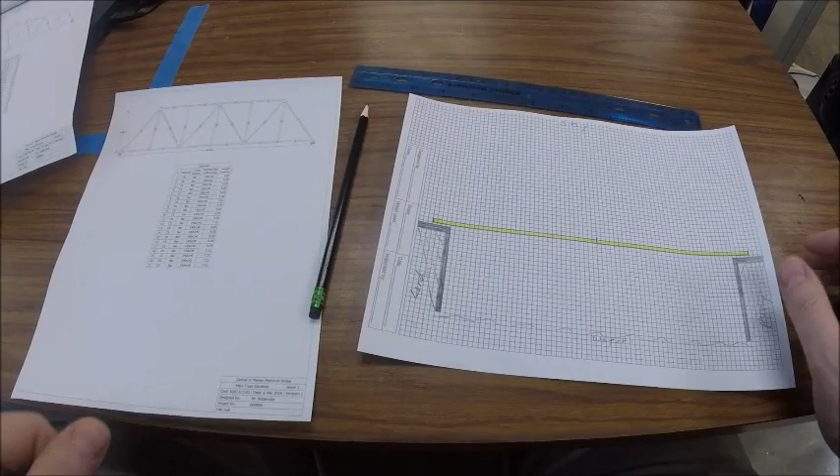Hey everybody, on this video I'm going to show you how to make a standard through truss bridge. So if your printout is something like this, it's a standard one section through truss bridge. It doesn't have to have verticals, but it'll work for this. This is a process you're going to use to do a standard through truss bridge.

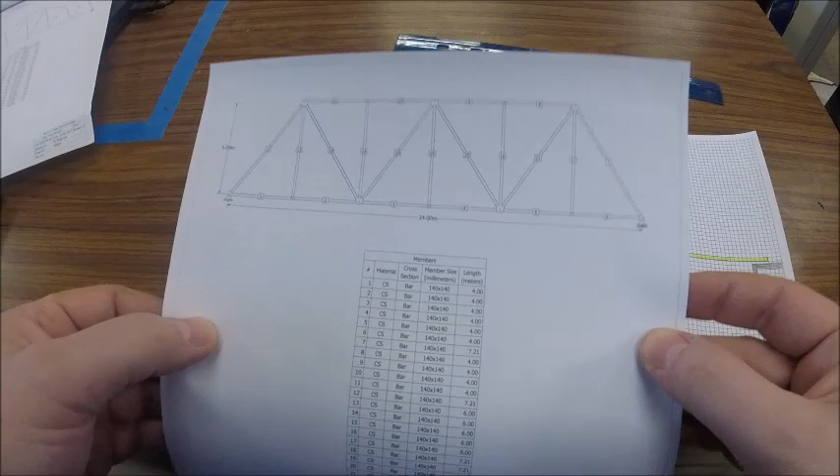You'll need your printouts, your yellow bridge building sheets. I'm using white so all my marks show up better for the video, but you'll need to have a yellow sheet. You're also going to need a ruler and a pencil, not pen, a pencil.

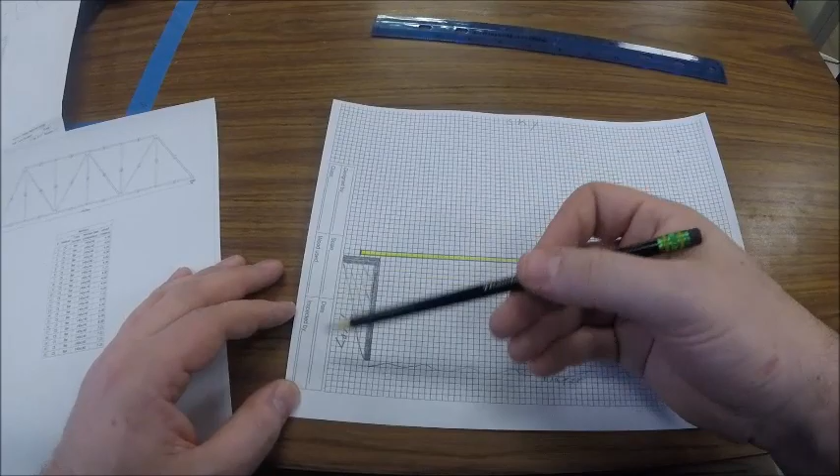The first thing you're going to do when you get your yellow sheets is over here on the left, it says designed by and class. Don't worry about the other ones, we won't use that. What you're going to do then in the designed by is write your first and last name. So I'm putting Mr. Rademski. You're going to write your first and last name, and for class you'll put whichever class period it is you're in.

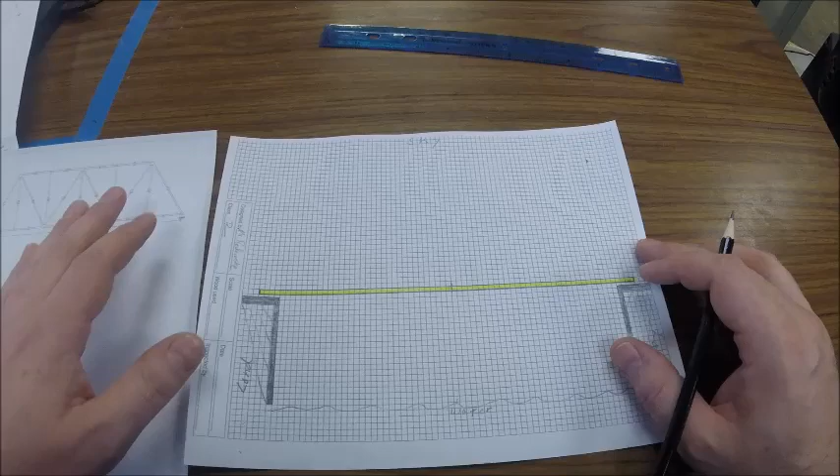What we're going to do to start this off is we have to first look at some minimum sizes. So for a standard through truss such as this, there is a minimum height requirement. Okay, to do that you have to find your road deck. I have highlighted my road deck yellow so that you can see it. Yours is not yellow on your page. It is just an outline here that you can see. That is the road deck. That must be included into your drawing. That will be the bottom beam of your bridge.

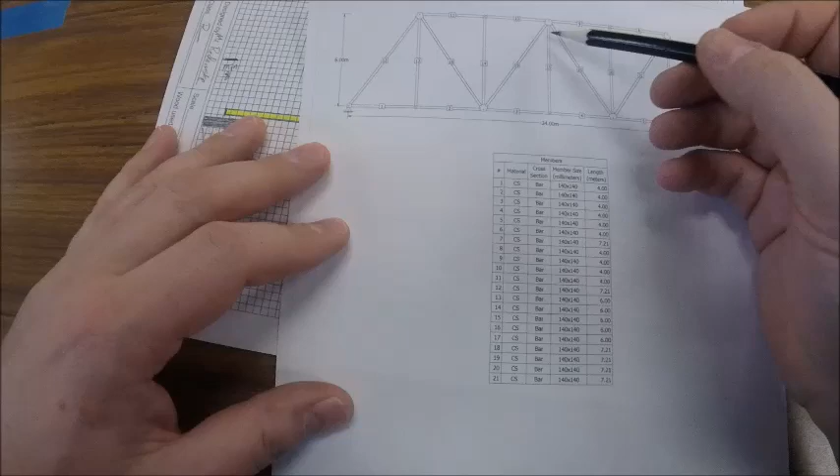The minimum height requirement above this is 8 boxes or 8 rows. Okay, so what we're going to do on the end over here, we're going to count up 8 boxes. 1, 2, 3, 4, 5, 6, 7, 8. Okay, at the top edge of that box, we're going to come over and put a line, and you're going to put min for minimum 8. So that line is the lowest that the top edge of your bridge could go. So if you were to build this bridge here, this top beam could be at a minimum of 8.

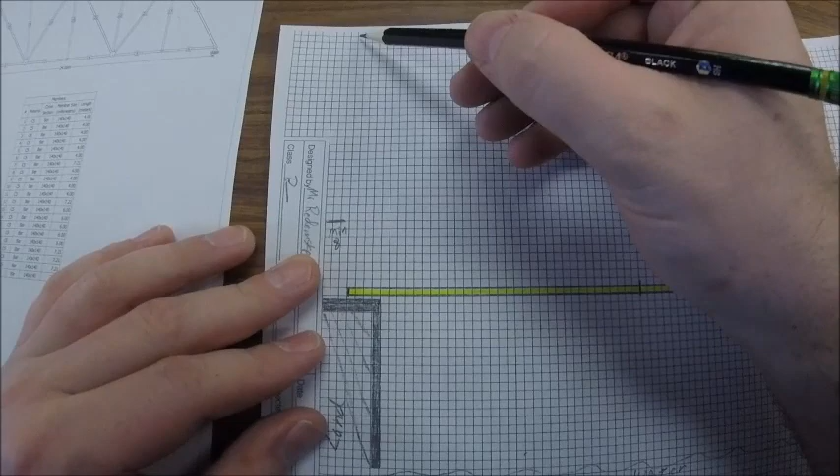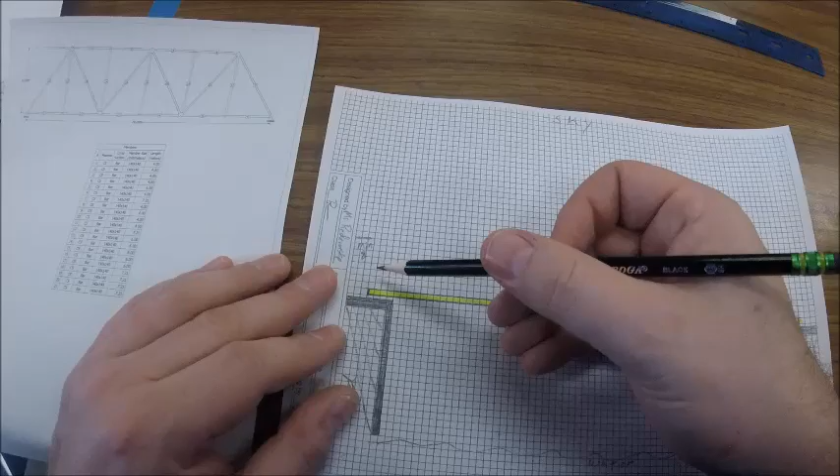Your max for a through truss is all the way up to the top line on your paper. You can come all the way up here if you want. So those of you that want to make it really, really tall, go ahead and make it really, really tall. It just has to fit on the boxes on your paper. So that's the first thing you have to do, is find that, and then you and your partner will need to discuss how tall you want your bridge. Remember, you both have to have the same height.

You're also going to have it where these top corners line up with each other so that your bridge will fit together. So your height and your overall width on top have to be the same. They will be identical on the base so that they fit on the testing rig. So you and your partner right now need to discuss how many boxes is it going to be tall and how wide is it going to be.

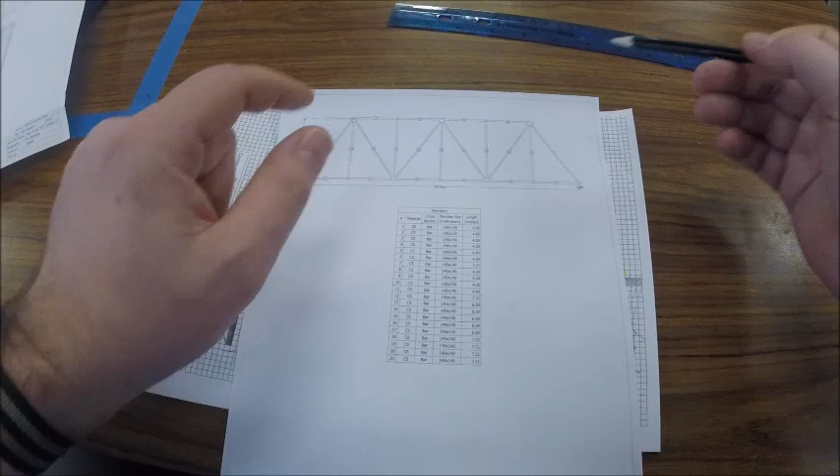Now that you've decided that with your partner, we're going to mark out here on our paper where it's going to go. So I have decided with my partner, myself, that I want to make this bridge 14 boxes tall. So what I need to do, start with my 8, and I'm just going to count up from here. So I'm going to go 8, 9, 10, 11, 12, 13, 14. On my 14th box, what I'm going to do is put a little C shape around it. Now this might not be where the beam is actually going to end, but I'm going to outline these 3 corners of this box.

That is kind of like the end of our wooden beam. Our wood pieces are as wide as these boxes. They're actually square, so when you have the end of it, it looks just like one of these boxes. So this C shape is going to be where I line up my marks. What I'm going to do then is, with my ruler and pencil, very lightly, I'm going to line up with the bottom edge of this C, of this 14th row that I picked.

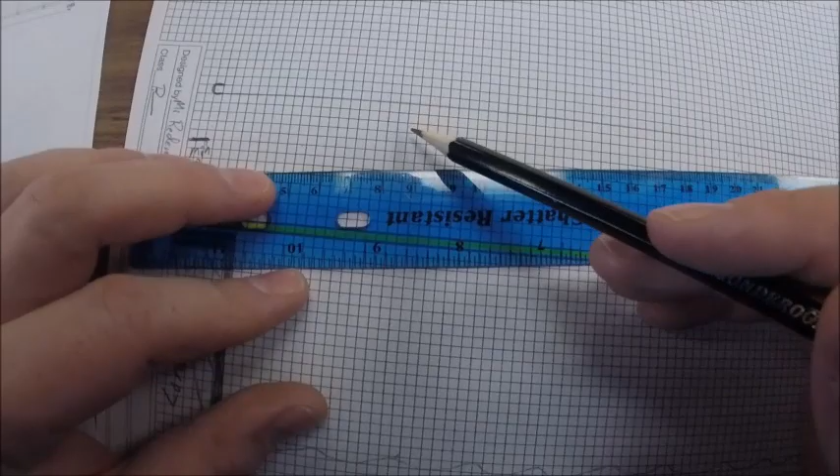You can pick whichever, and very lightly draw across your page, just dark enough so you can see the difference in the line. You're going to do the top edge as well. Again, very lightly, just so you can see it. That way you know where your top beam is going to be. This is setting our height.

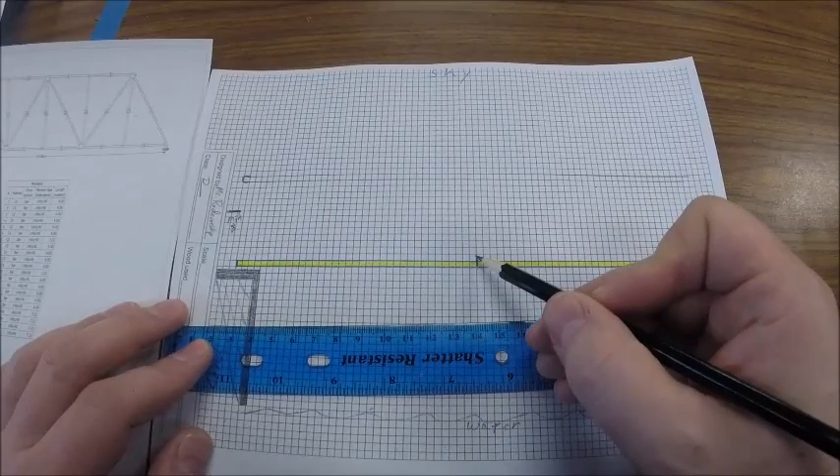Okay, what we do next is going to come in from there. Next, we need to find the middle. So this line that is here in the middle of your paper, it's a little dark line right in the middle of the road deck. You can go ahead and mark up that a little bit to make sure it stands out. That is the very center of your bridge. It's very important that we keep track of that and know where it's at.

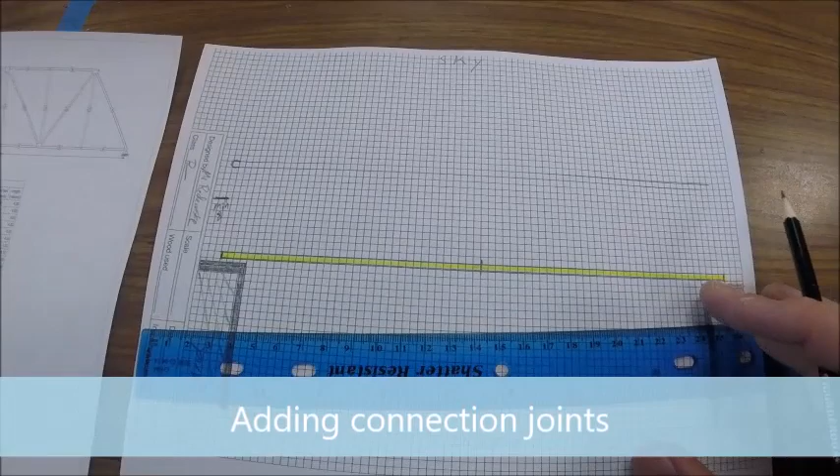What we're going to do is divide our base, our road deck, into sections to match our drawings next. This will help locate where our parts will connect to the road deck. So if you look at your printout, you can see that along the road deck, which is this bottom part, you see the anchors here and here.

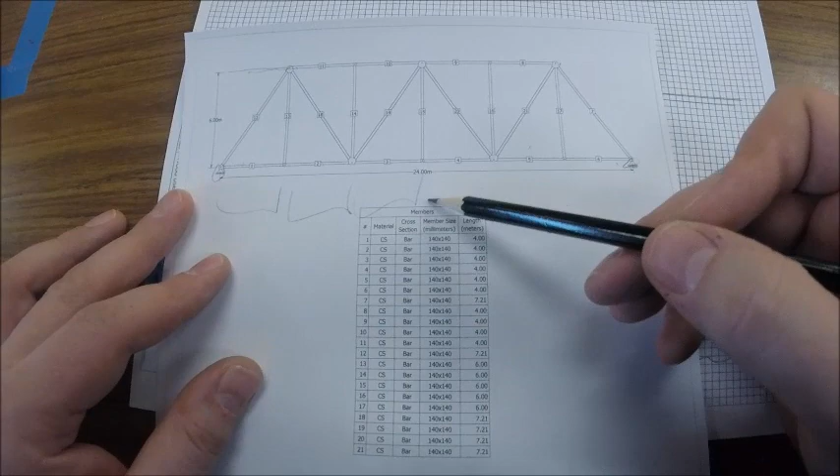The road deck in sections has 1, 2, 3, 4, 5, 6 sections. So if you look at this section here, it's also all split up by the little beams, and these are the connectors that were in place on the program when we designed it. So there's 6 sections. So we're going to look at just half of it. So right now we have 3 sections on just this half.

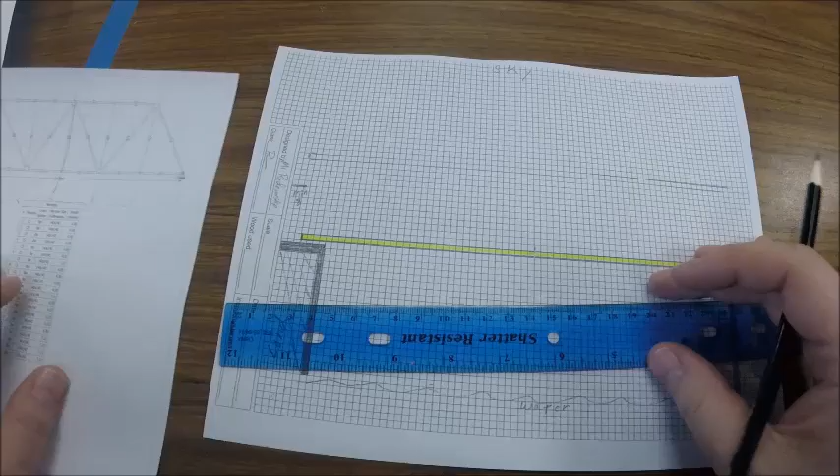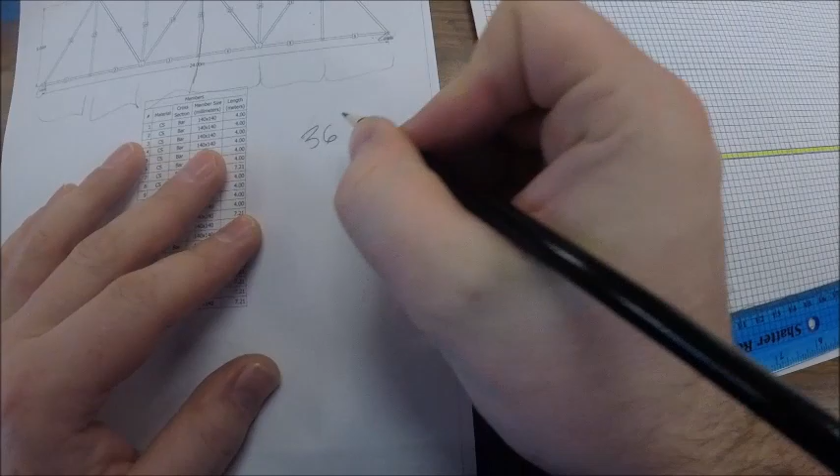This is halfway. Okay. On our box paper here, what we're going to do is count how many boxes there are from half to the end. When you're done counting, you hopefully came up with 36 boxes, and that is 36 boxes from the midway point here to the end. It works this way, it works this way.

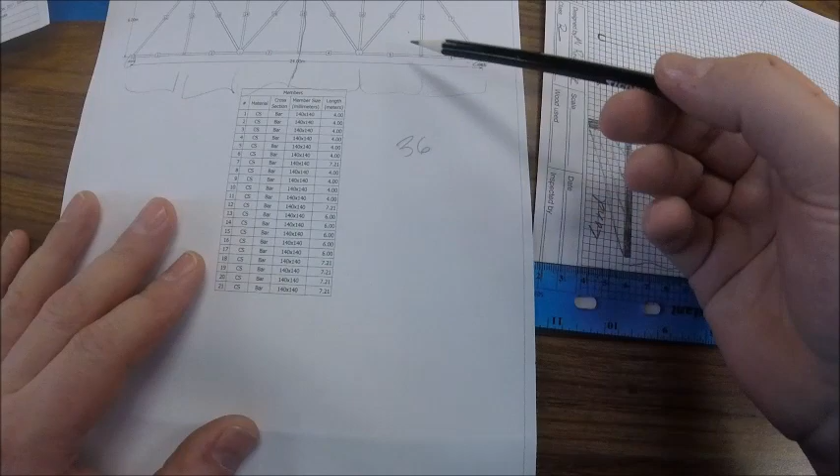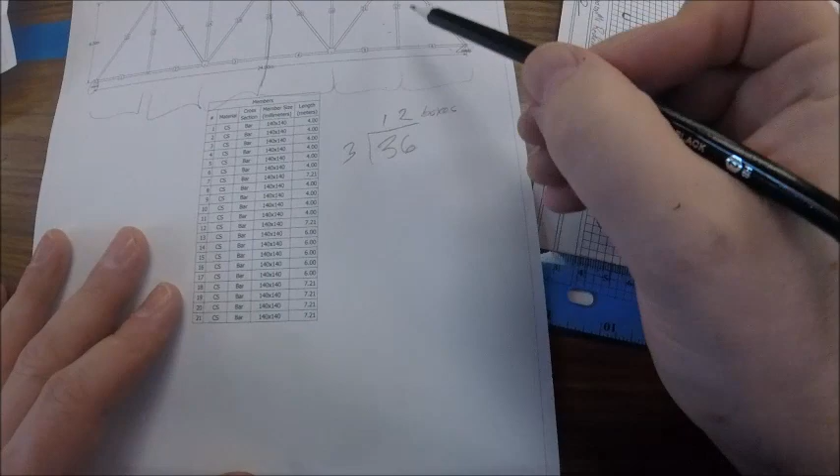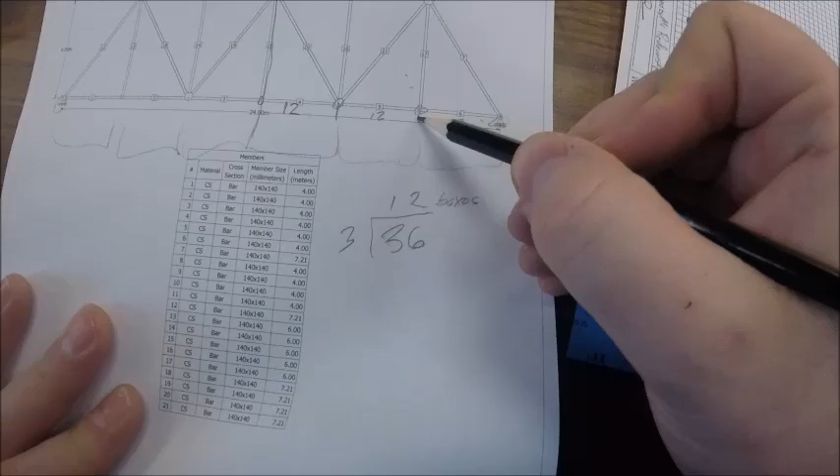It's 36. What we need to do is take our 36 and divide it by the number of sections we have on that half of the bridge, which is 3. So when you divide 36 by 3, your answer is 12. What that 12 gets us is how many boxes we're going to move out till the next connector. So we should have 12 boxes here, 12 boxes here, 12 boxes here. So each of these sections is going to be 12 boxes.

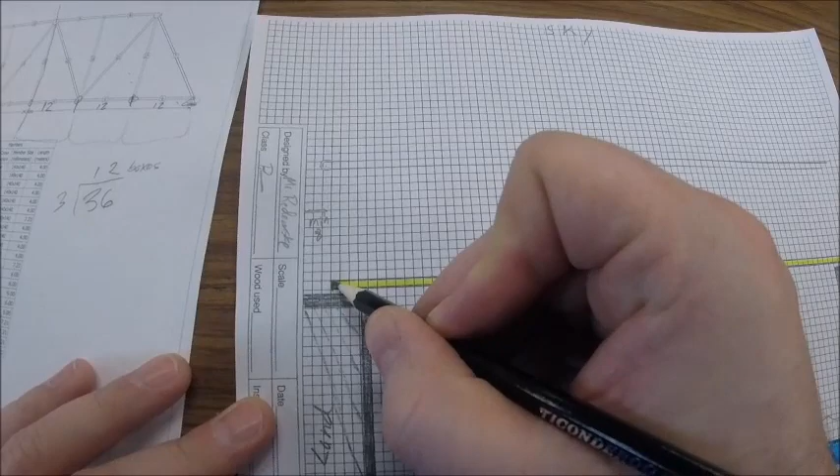So to do that, we're going to start on our paper. On the ends, it works the best way to do this. So we're going to take our end box and we're going to fill that in. That's where our connector is going to go. So this piece here is going to connect right here in the end. So we're going to fill in that box.

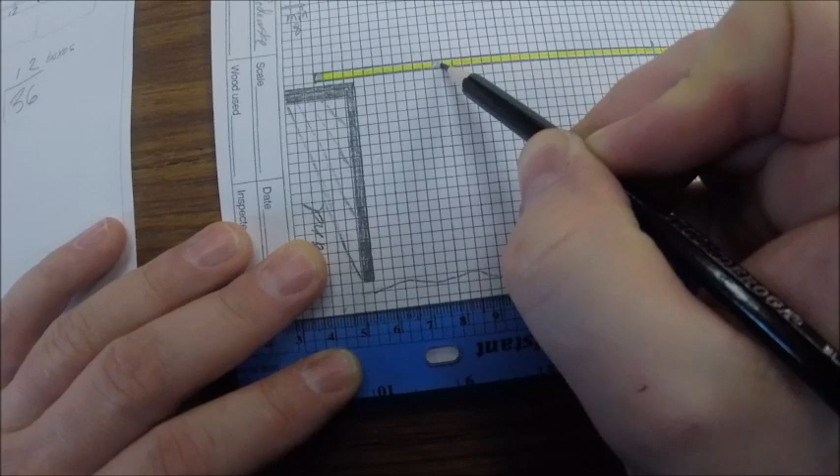Now we need to count over 12 and fill in. So we're going to go over 1, 2, 3, 4, 5, 6, 7, 8, 9, 10, 11, 12. We're going to shade in that 12th box. It's important to color inside the lines so you know where it's at. We're going to go over 12 again. 1, 2, 3, 4, 5, 6, 7, 8, 9, 10, 11, 12.

Now for right now, we're going to skip the middle. We're going to go to the other end and do this here. So fill in this end box. Then we're going to go over 12. 1, 2, 3, 4, 5, 6, 7, 8, 9, 10, 11, 12. Shade it in carefully, go over another 12. 1, 2, 3, 4, 5, 6, 7, 8, 9, 10, 11, 12.

If we count 12 in, it ends up kind of right overlapping this middle line. So what we're going to do on the middle line is just lightly split the 2 boxes on either side of it. Those are going to be the midway point, and I like to kind of leave that one open. You can see if I zoom in or pull this up here, you can see what I did on that middle line. Just drew the box kind of halfway between the other lines there, because the middle is actually on a line, not in a space.

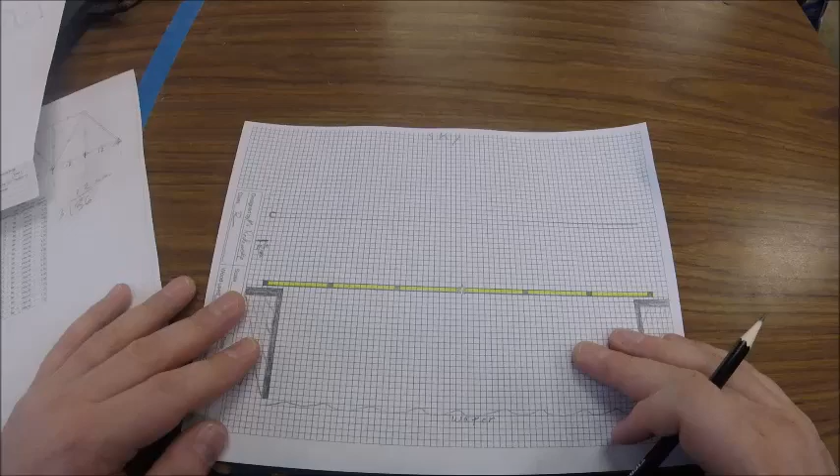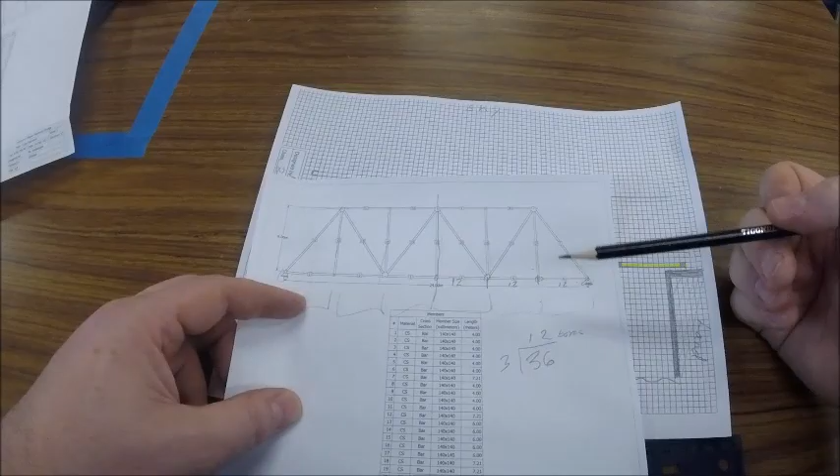Once we've got that marked, now we have to look at our design again and figure out where our connectors are going to go. In this particular case, we have angled ends and we have vertical supports. So we're going to mark our vertical supports here. So since these are straight above, we're just going to go straight above, which is pretty simple. So we have our top line drawn on here already very lightly.

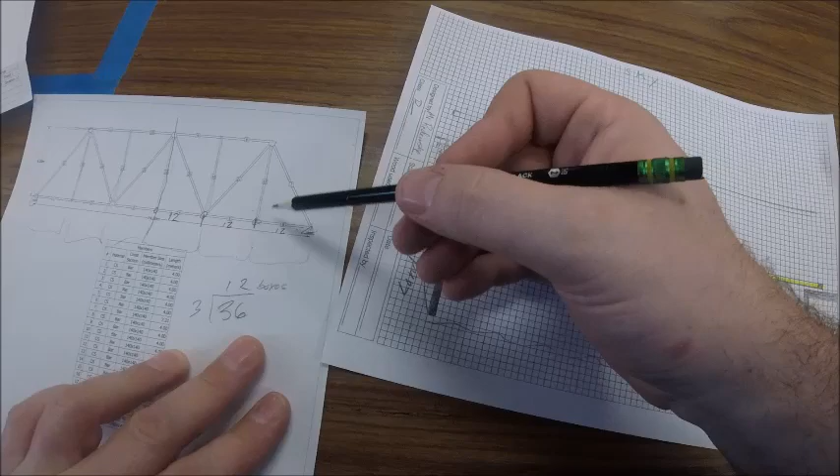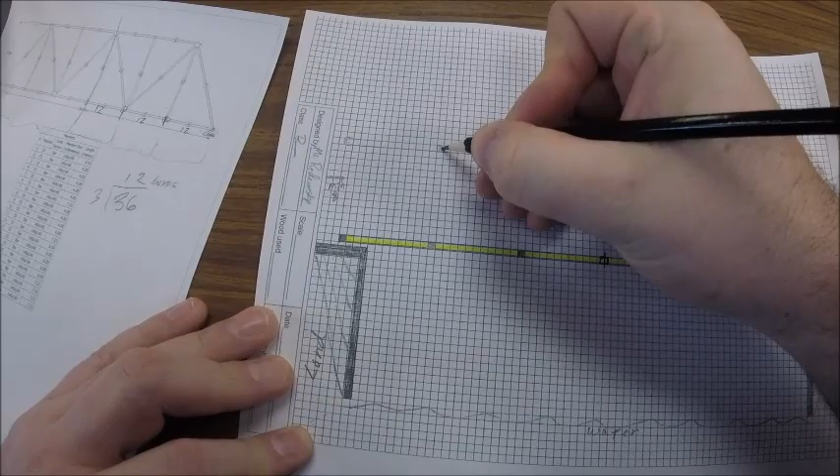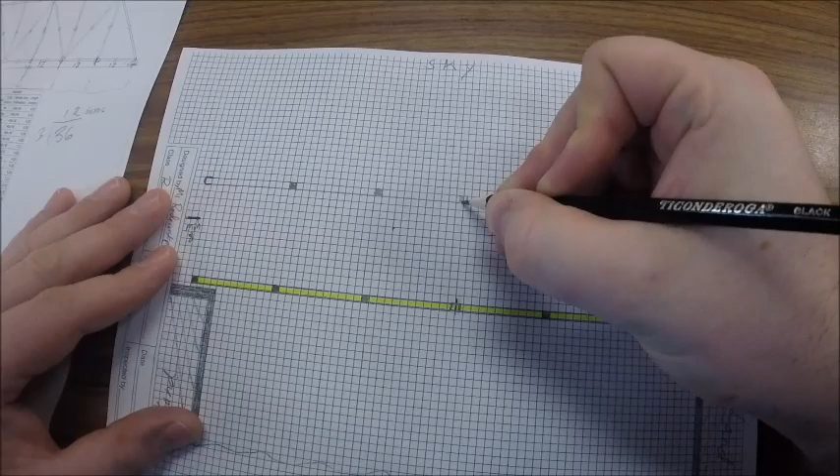So our first corner, if we look here, it's going to be straight above the second connection on the bottom. So we'll move over to this one here, come straight up. Again, carefully shade in that mark. Then we just come over straight up, shade in those marks. You can come up the middle and then split that box again. So it's splitting the line, as you see there.

Come up this one. Come up to our last fill in. Again, remember it's the second one in from the end. So we're going to come up, straight up the column, and fill in. Now that we have our top marks done, we're going to erase these extra lines, so that they're out of the way and we don't accidentally try to connect things. This is why we said make those lines light. So we got that there.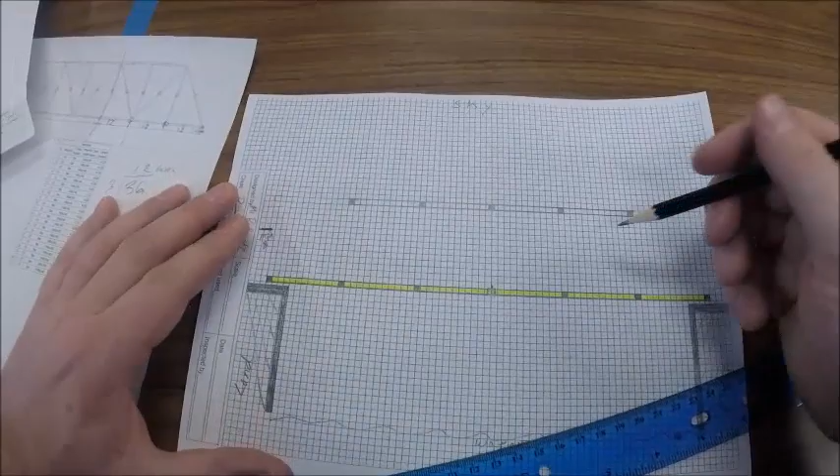What we're going to do now is go over this top section between this mark and this mark a little bit heavier to make sure that we can see it very clearly now. So we're very clearly going to go over, pushing a little bit heavier, using our ruler to make sure our lines are straight. And we're going to connect our top box. So now we have our top beam and our road deck beam. So the first parts you then draw in are our vertical beams.

So what you want to do to draw our vertical beams, we're going to take our ruler and our pencils. We're going to put our pencil on the corner of the box first, right on the corner. We're going to line up our ruler next to that so that we have the same distance. We're going to draw right down that line to the bottom box. Go over it lightly the first time, a little heavier the second time, so then we can see our line clearly. Then you go to the other edge of those boxes, lightly, a little heavier to make a nice clear line. Now you can see I have my vertical.

We're going to do that again for the rest of our verticals. Line up your corners, lightly, then kind of hard. Now this one, the middle, you really got to pay attention. Make sure your spacing of the ruler to the line is the same up and down and on both sides. So that way you can make sure it's straight. Again, come over.

Again, make sure your lines are lined up first. Your ruler's lined up. Make a light line, make sure it's there. And then a dark line. Should something like that happen when your pencil breaks, blow it off, not wipe it off with your hand. If you wipe it off with your hand, it will make a big smearing mess on your paper. There's our vertical lines, our vertical supports.

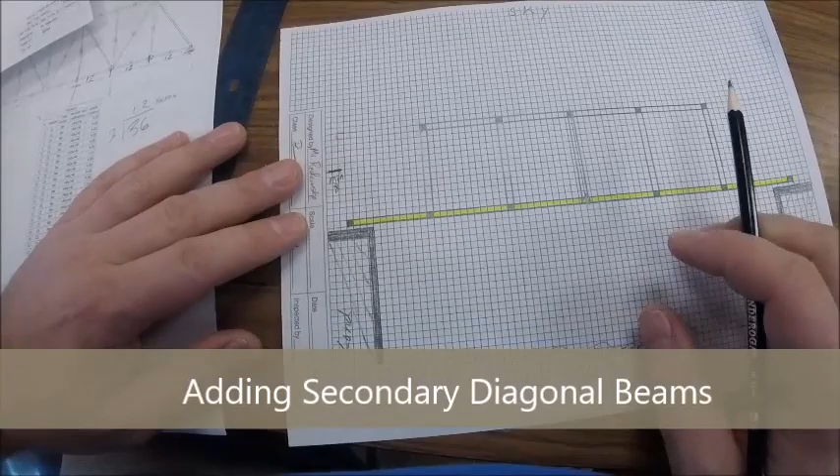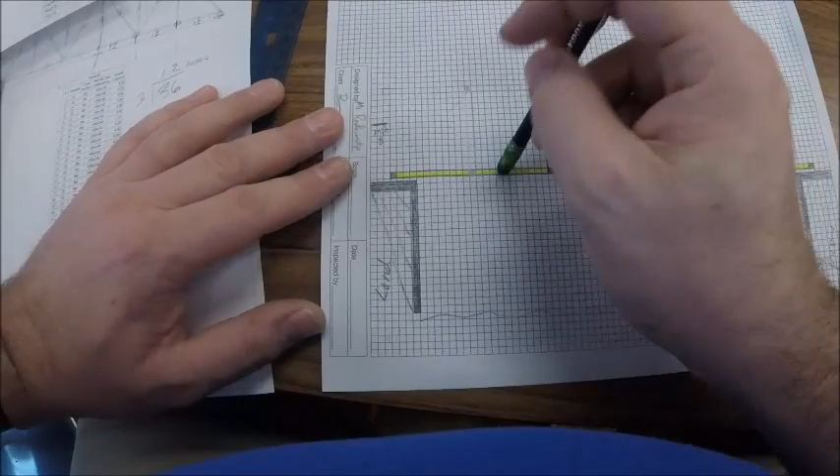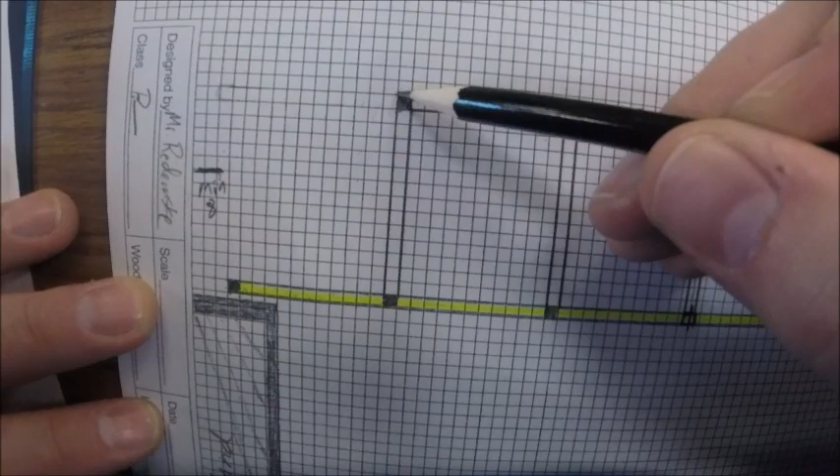Next we have to start making diagonals. The very important part with this is that you line up your ruler with the proper corners. So we're going to start on the end, our end pieces. What we're going to do is take the top corners, so the very top corners of this end box, and we're going to line them up with the outside corners of this top box.

So we're going to take our pencil at the top left corner on the outside edge of this box here. We're going to line it up with the top left corner of this bottom box on the end. This is going to help support it a lot. So we're going to go very lightly first. Make sure everything's lined up. Once it looks good, you go over it a little bit darker.

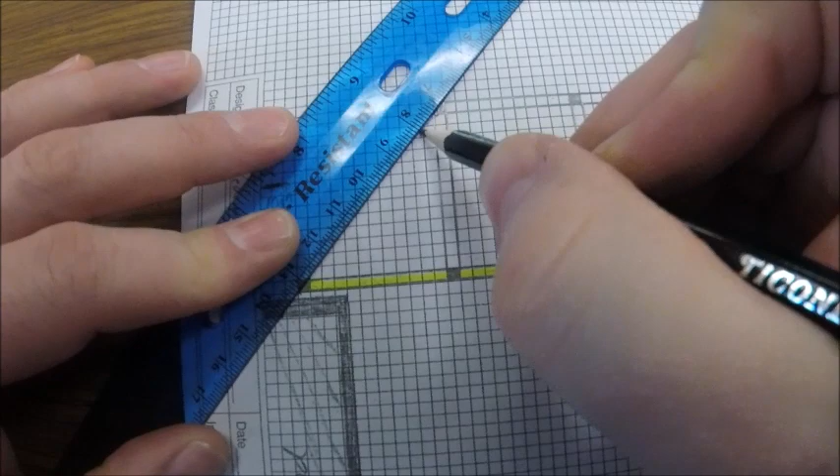Now we're going to line up the bottom left corner of this piece with the top right corner of this box down here that we've shaded. So again, top right corner, bottom left corner. Get them lined up. Connect it. It should still be roughly 1/8 of an inch wide as you go.

Alright, same process out here on this end. We're going to go top right corner now with the top right corner of the bottom. And then top left corner of the bottom with the bottom right corner of the top. So we have our basic shape.

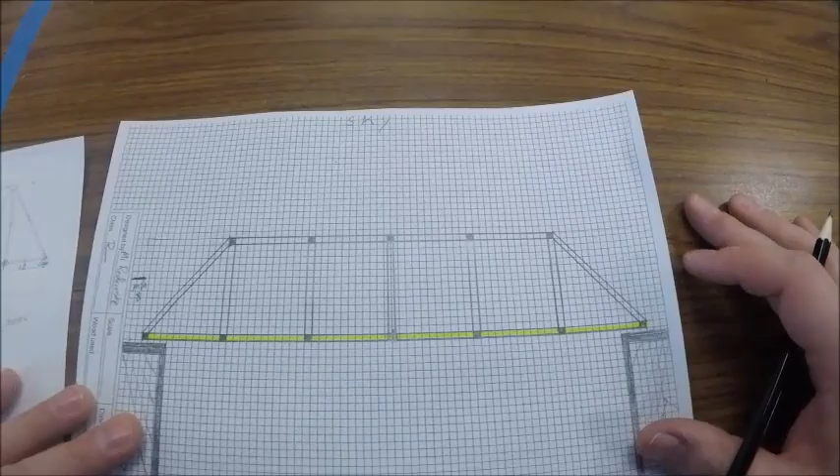Now for our inner angles, we're gonna have to do a little tricky here. Our inner angled pieces, so our diagonal pieces on the inside, are not going to connect to the top and the bottom. They connect to our vertical pieces. So I'll show you that here a couple of times. So we're gonna start on this end one here. Per our design, it comes down diagonally to the right.

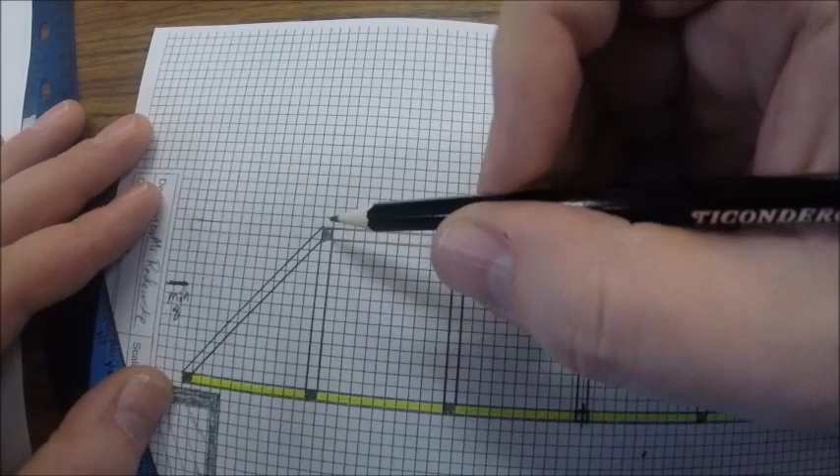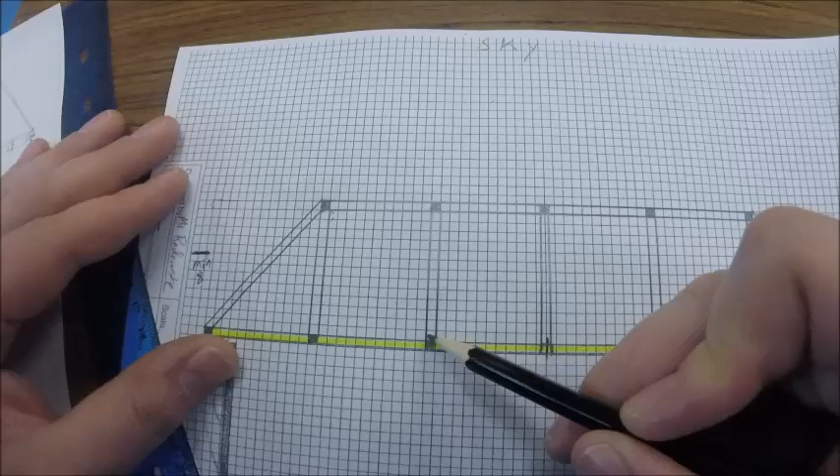So we're going to start this right here at this top corner. So it's going to attach to our vertical piece at the top corner. It's going to be a full box wide here, and then it's going to come down to the bottom, a full box to the bottom corner and up one. So the top edge of our beam at the top is going to be right in the corner. At the bottom, it's going to be one block up. So one block up from the bottom, and then right in the corner up top. So we're going to line up our pencil, line up our ruler, go lightly and then make it solid.

So again, you see we're in the very top corner, and at the bottom, we're one box up from the bottom. The bottom edge is just the opposite. We're in the bottom corner and one box down from the top. Okay, so just like that. So you can see box up, bottom corner, one top corner, one box down.

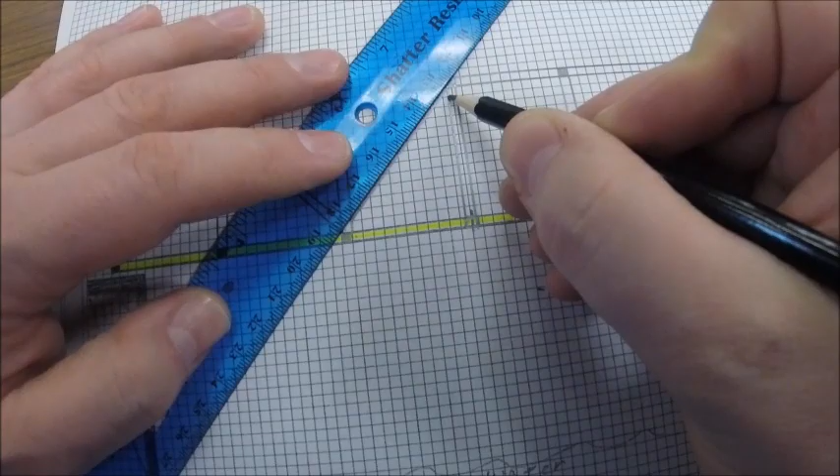Our other angle goes just the opposite way, but it works the same thing. Our top corner is going to go to one box up from the bottom. Our bottom corner goes one box down from the top. So it's the same process all the way across. So we've got that there. Our next one comes down at an angle. So again, top corner to one box up from the bottom, one box down to the bottom corner.

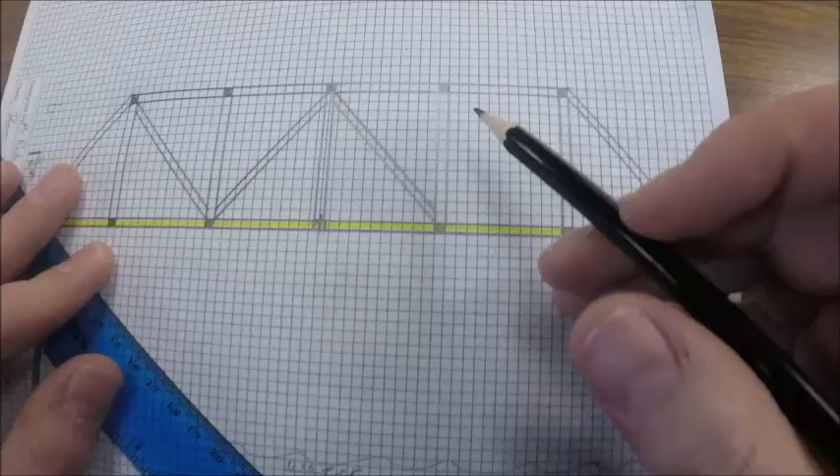Now you can see there I didn't quite have things lined up, so it's a little skinny. It's okay, that's why we make erasers. So I'm going to clean that up and make sure I'm really at the corners here to make this happen. This is also where having a nice sharp pencil pays off. Now you can see my width is much better, and it better matches the width of the boxes.

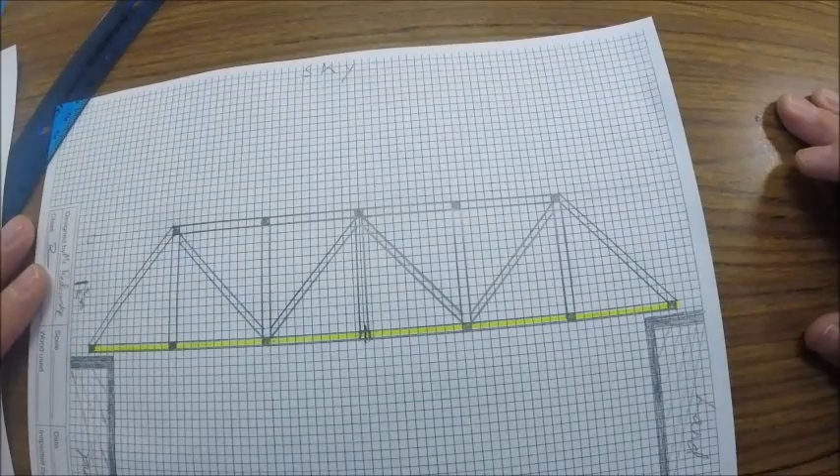Last one is going to come diagonally up here. Okay, so again, top corner to one box up from the bottom, bottom corner to one box down from the top, and there, my bridge is drawn. There you go.